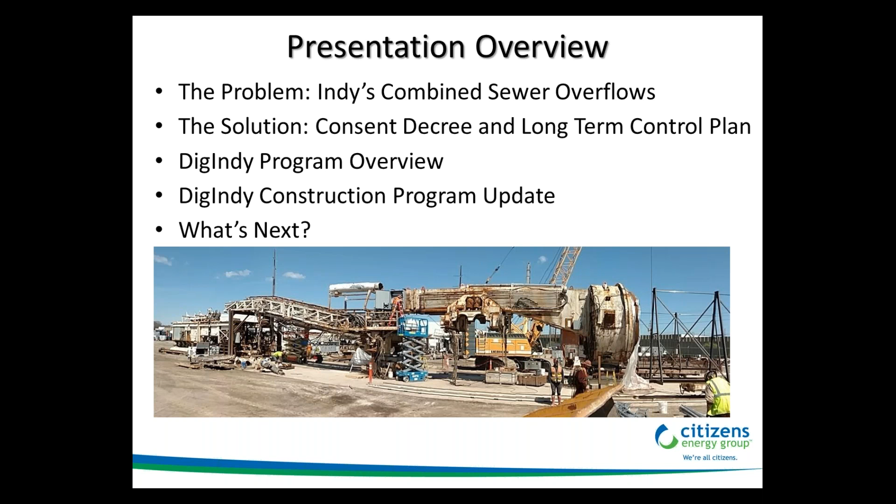Just to set the tone for the rest of the presentation, I'm not a big fan of slides with lots of words, so I'm going to try to keep those to a minimum. But there will be a few, so please just bear with me for a few slides, and then we'll get into more of a show and tell mode a little bit later on.

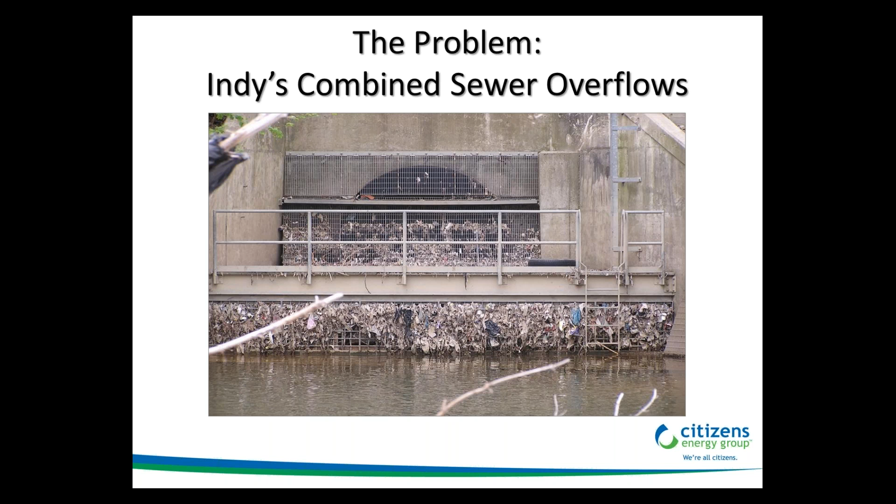So quickly, for anyone that may not be familiar with a combined sewer system, I'll provide this brief explanation. Basically, during dry weather, a combined system collects and conveys sanitary flow from residents and businesses to a wastewater treatment plant, where the flow is treated and released into a water body. However, during wet weather, the combined system also collects storm flow, and in many cases in our northern cities, snowmelt, which combines with the sanitary flow. During certain size weather events, the system becomes overwhelmed, and rather than backing up through storm grates and into basements, combined flow is released to a water body.

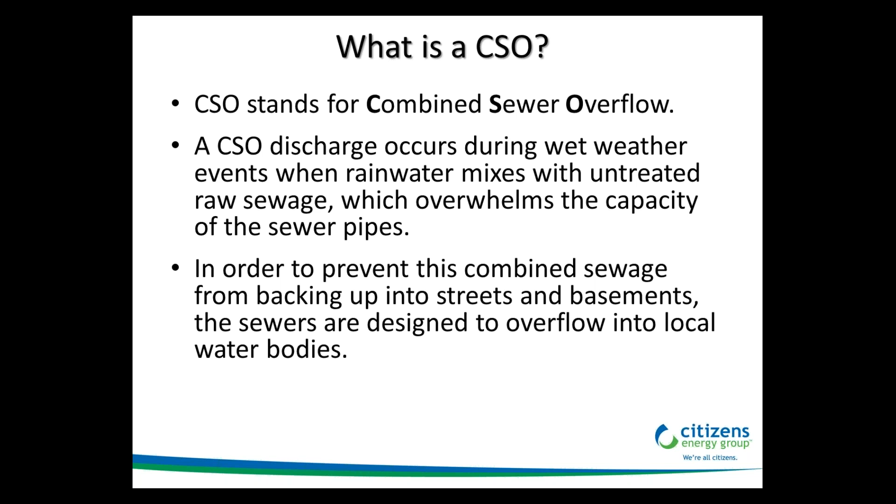And not to mention, portions of our system are so overwhelmed that as little as a quarter inch of rain in certain parts of town can trigger an overflow event.

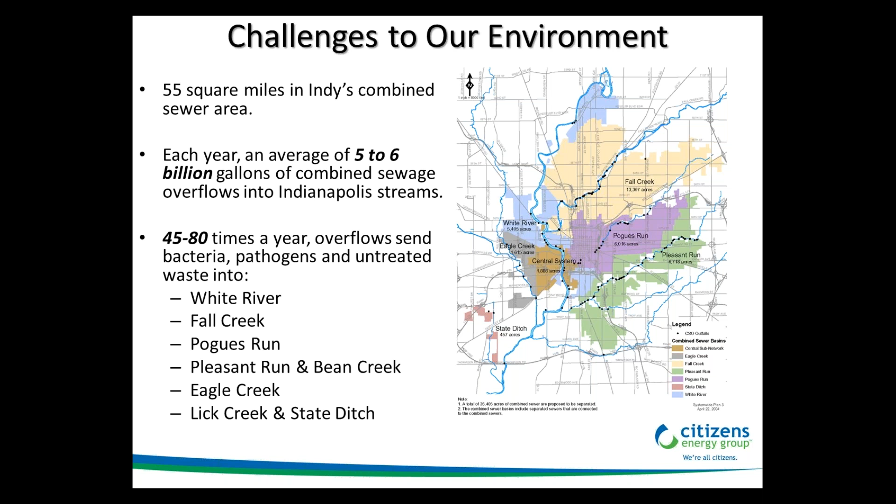So I've defined the problem. Now, what are we going to do about it? Just a little bit of background here. CSO abatement actually stemmed from the Clean Water Act. Ultimately, CSO communities must enter into some form of settlement with the Department of Justice and the EPA. Usually those agreements come in the form of a consent decree.

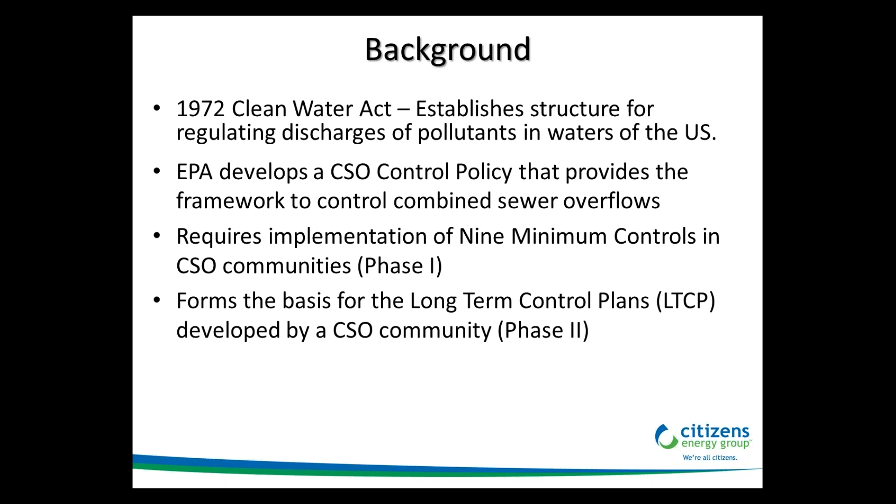A consent decree is a settlement binding a CSO community to comply with the EPA's CSO control policy. What I'll be concentrating on for the rest of this presentation is our long-term control plan, which lays out our DigIndy system, as well as the time frame for which we have to complete it. And finally, one other quick point before we get into the fun stuff.

The City of Indianapolis entered into their consent decree in 2006. But what is unique to Indianapolis' situation is that in 2011, Citizens Energy Group purchased the water and wastewater assets from the city. Per the terms of that purchase, Citizens became liable to comply with the terms of the consent decree, but the city actually remained party to the agreement as well. So it's actually in their best interest for Citizens to successfully comply with the consent decree.

Citizens is somewhat of a unique entity in that we are a public charitable trust. In fact, we are the only public charitable trust that provides utility service in the United States. The important takeaway here is that we exist solely to provide utility service to the residents of Central Indiana. We're basically a private company that operates on a zero profit basis, so we don't have shareholders to answer to. This is especially important when considering that we can procure projects outside of traditional municipal bidding laws, and I'll provide some examples of that in a few minutes.

As I previously mentioned, our long-term control plan was actually developed under the City of Indianapolis and their team of consultants, and Citizens inherited it in 2011. However, it does continue to evolve. Basically, there were a number of early action projects which utilized modified flow control or inline storage to take advantage of areas in the system that had excess capacity. And those projects actually eliminated a significant amount of CSO volume from entering our waterways.

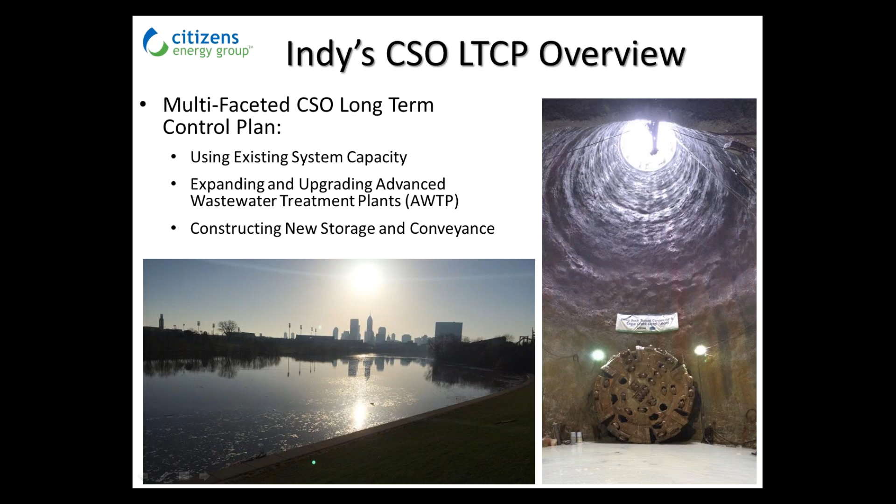The system consists of 6 interconnected deep rock tunnels, which will be 18 feet in finished diameter when complete. The entire system will convey flow from north to south via gravity, where it will end up at our Southport Advanced Wastewater Treatment Plant. So while we do have 2 treatment plants serving Indianapolis, all of the tunnel flow and all of the CSO flow connected to the tunnel system will be conveyed strictly to our Southport plant.

But after a CSO event, the flow will be stored in the tunnel, and then it will be lifted by a 90 million gallon per day pump station almost 300 feet vertically up into the plant. The entire system has a storage capacity of well over 250 million gallons per event, and that will allow us to comply with our consent decree terms, which requires 95% capture by volume.

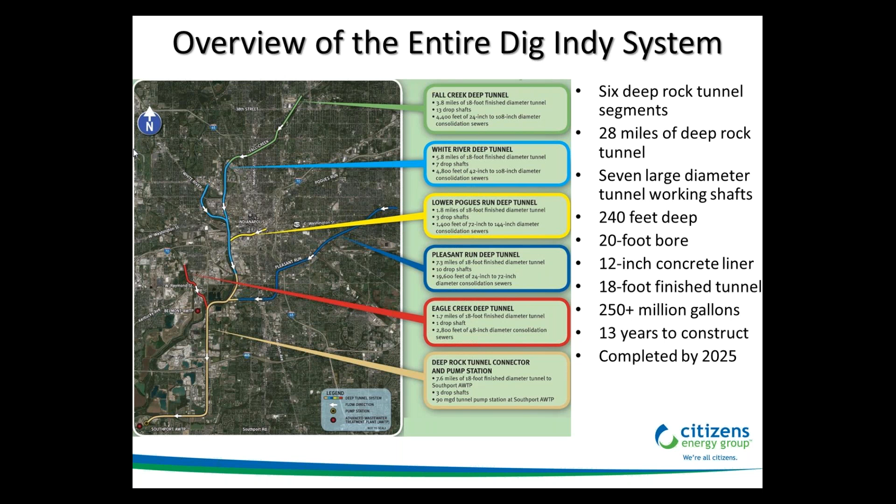Flow will be diverted from CSO outfall structures and consolidated through soft ground surface sewers, where it will enter one of 33 planned drop shafts. The drop shafts extend down into deaeration chambers, which are connected to the main tunnel through smaller tunnels referred to as adits. Depending on where the drop shafts are located with respect to the main tunnel, the adit lengths in our system can vary from a few feet to hundreds of feet.

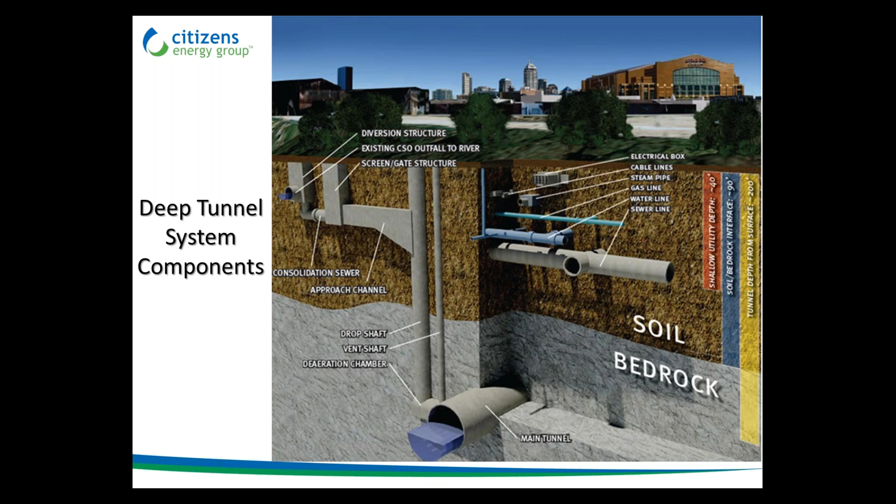At each drop shaft location, we also have a vent shaft that extends down into the deaeration chamber. The vent shafts are necessary because we utilize tangential vortex drop shafts, which entrain a great deal of air as flow falls down the drop shaft. The deaeration chambers allow for the air to escape rather than inhibit filling of the deaeration chamber and tunnel.

I mentioned earlier that we have 134 CSO outfalls in the system. The tunnel won't capture all of them, but we will be consolidating approximately 100 of them into 33 drop shafts. We want to keep the number of drop shafts to a minimum due to the cost to construct and the surface disruption, and we're actually studying eliminating 2 of them along our Pleasant Run alignment as we speak.

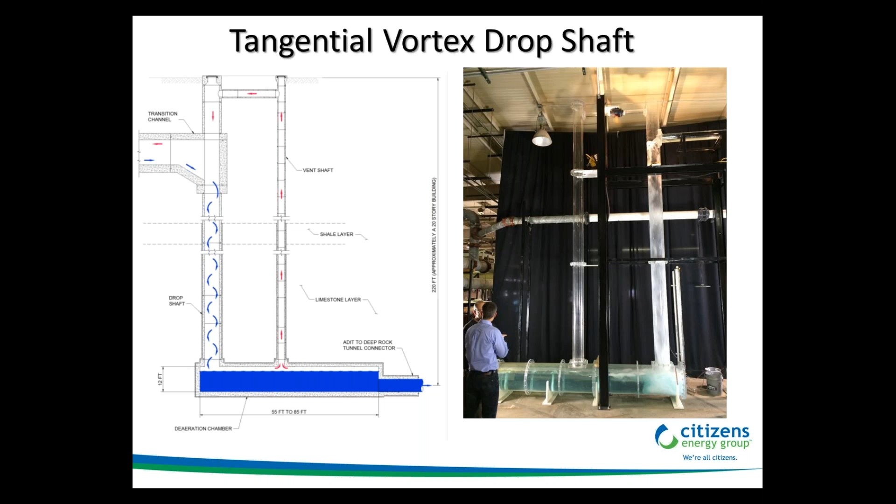So the program is constantly evolving. And because I mentioned the deaeration chambers and vent shafts, I want to take a quick second to discuss tunnel ventilation with respect to air exiting the main tunnel during filling.

Where it will eventually exit at the first few shafts it encounters. Our issue is that the first couple of shafts are small diameter utility access shafts, and the velocity and violence with which the air exits will cause geysering.

We know that other systems, including Chicago's TARP system, have had real issues with geysering, and they've actually experienced geysering events so violent that manhole structures have been blown out of the ground.

So we've done extensive research and physical modeling to understand this phenomenon, and to prevent geysering in our system, we're actually going to seal off our utility shafts where they intersect the tunnel, forcing the tunnel burp up to one of our larger diameter tunnel working shafts. We're also building bulkheads along the crown of the tunnel at a few of our branches to keep air from heading towards dead ends and direct it to larger diameter shafts.

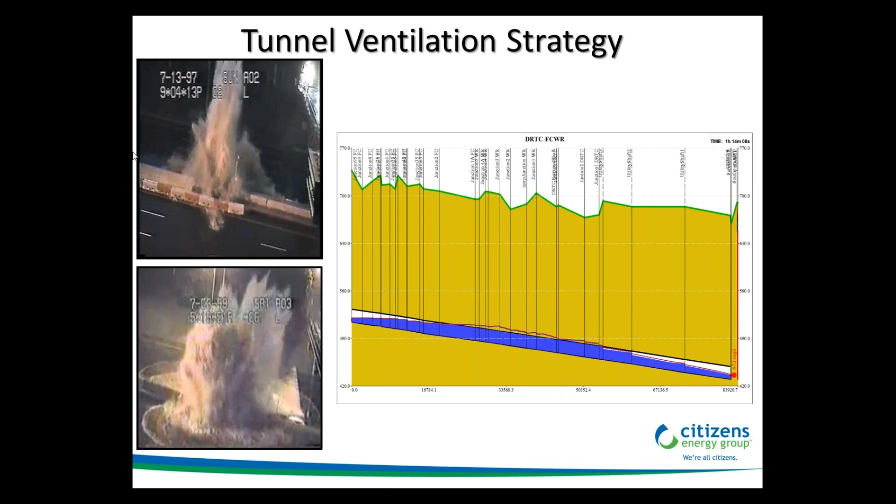They don't see it, but it's the miles and miles of shallow consolidation sewers and the drop shaft sites which are extremely disruptive to residents, schools, businesses, and traffic.

We have a whole team of folks that work to form relationships and educate literally thousands of stakeholders impacted by the tunnel construction. We also have a team of real estate professionals dedicated to the land acquisition necessary to construct a program of this magnitude.

Designing and constructing a project like this isn't possible without poking a few holes in the ground, especially since it spreads out over 28 miles. So I won't spend a lot of time talking about the geotech, but it's important to note just how extensive a quality geotechnical program is for this size of project.

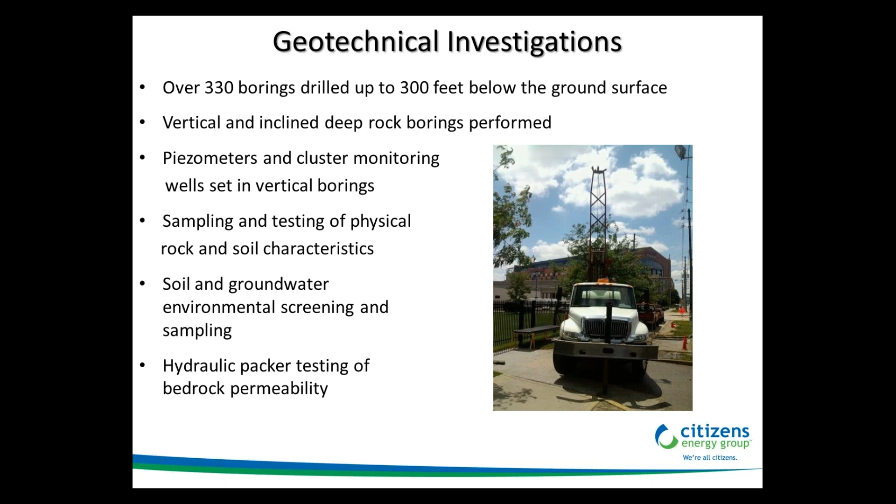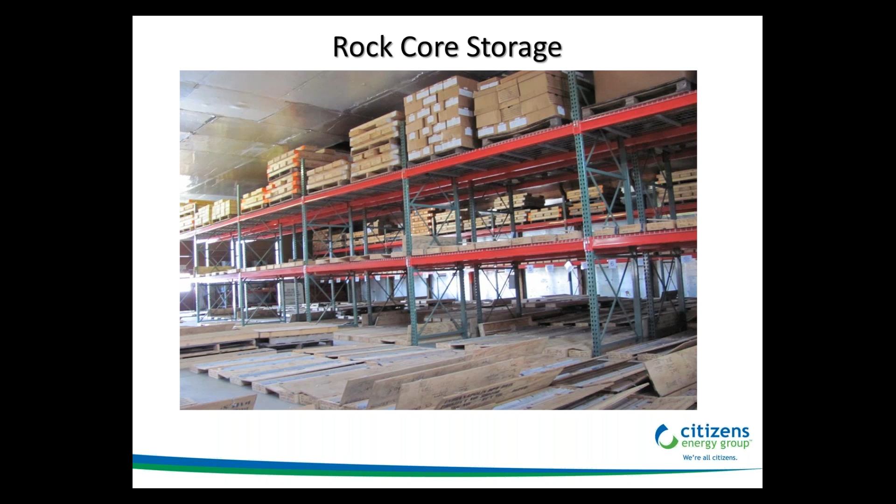You can imagine we collect a lot of samples with that many borings and the extent of the investigation. Here's a shot of part of our rock core storage warehouse, and another view of the other half with cores laid out. This was during a procurement event for our first tunnel project where contractors and their engineers were welcome to view the cores.

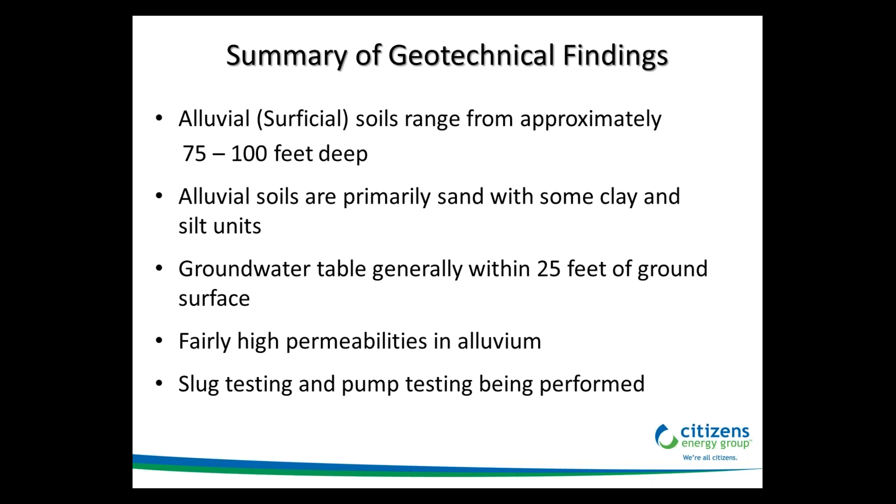So what did we find? Basically, on average, we have about 100 feet of glacial outwash over the top of our bedrock in the Indianapolis area. And we have a high groundwater table, which makes construction through pervious overburden very challenging. With respect to our rock, we have really favorable rock for tunneling. It's strong, but it's not overly hard or abrasive.

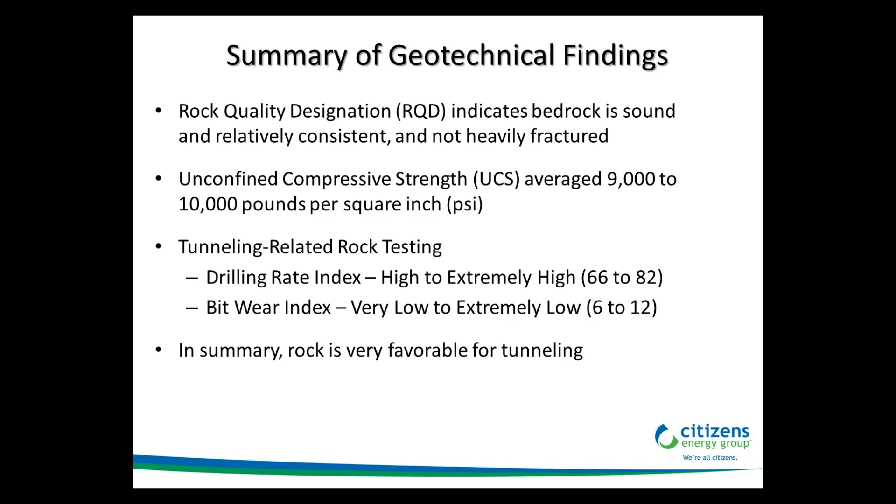Here's a representative illustration of our geology. We have Devonian and Silurian carbonate rock underlying most of Indianapolis. The shallowest bedrock formation along much of the alignment is the New Albany Shale, which is of the Devonian and Mississippian geologic age. Underlying that shale, our carbonate formations consist of North Vernon limestone, Vernon Fork limestone, Geneva dolomite, and the Wabash dolomite.

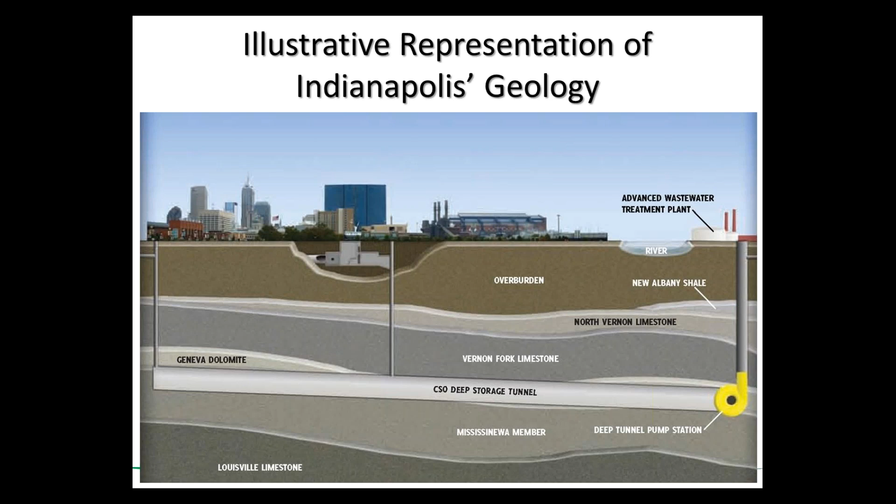I realize this is probably a little difficult to read, but we do have an aggregate mine within close proximity to the tunnel project. So here's another representation of the area geology.

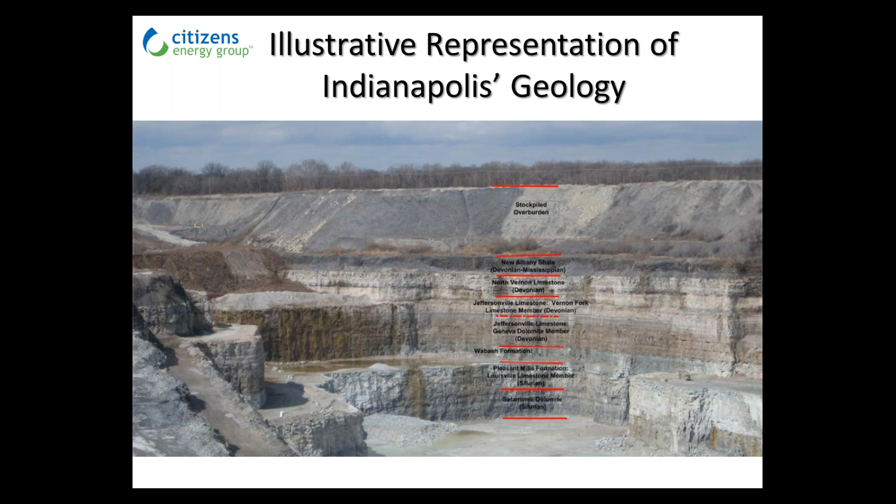We also have the potential for some karstic features, which can and do make water. We've never encountered one this large in the tunnel bore, but I've seen a few in the sidewalls of the tunnel that are actually on the order of a few feet in diameter.

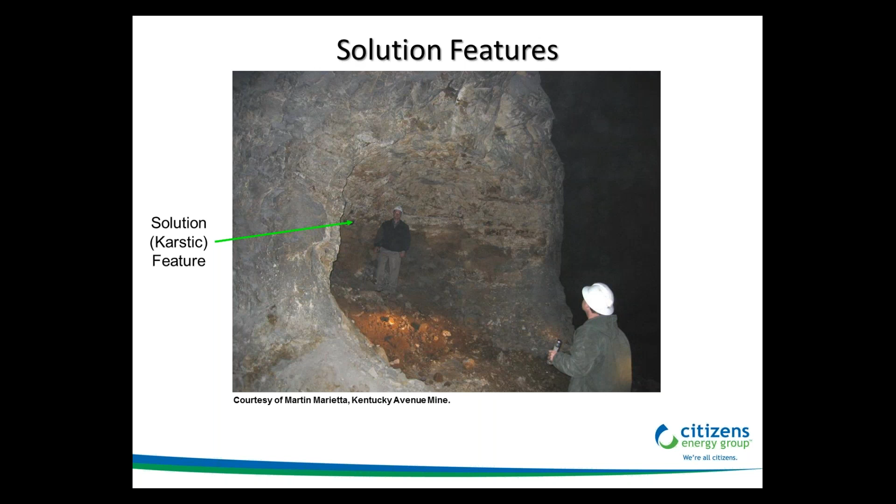So now I will transition over and spend some time discussing where we're actually at with the construction side of our program.

Based on the terms of the consent decree, we have a staged construction schedule. This allows us to spread out the construction effort and spend over time while still bringing parts of the tunnel system online early in order to gain beneficial use and start getting CSO flows out of the waterways as soon as possible.

For example, when we bring the Deep Rock Tunnel Connector and Eagle Creek Deep Tunnel online later this year, we'll begin capturing about 1.3 billion gallons of CSO annually. And when White River Tunnel and Lower Pogues Run tunnels come online at the end of 2021, we'll experience a huge increase in that annual capture.

So beneficial use before the end of the program is a big deal to us, and it also demonstrates to our ratepayers who ultimately fund this project that we are making steady progress and recognizing environmental benefits along the way.

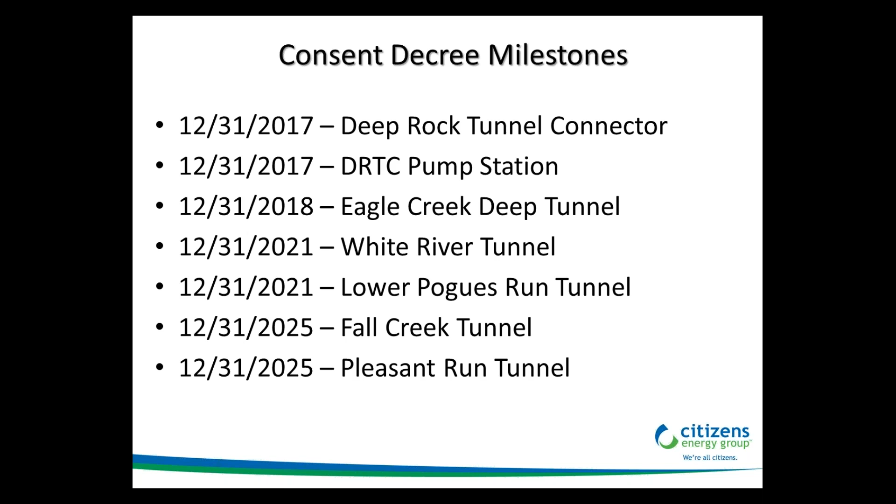I want to quickly point out that since construction commenced in January of 2012, we've received a lot of favorable press, both nationally and internationally. In fact, our project was recognized by ITA in 2015, which was a big honor. Of course, this is a testament to our engineering team and contractor. As an owner, we remain very humble and understand that without a huge team of talented people, success of this program wouldn't be possible.

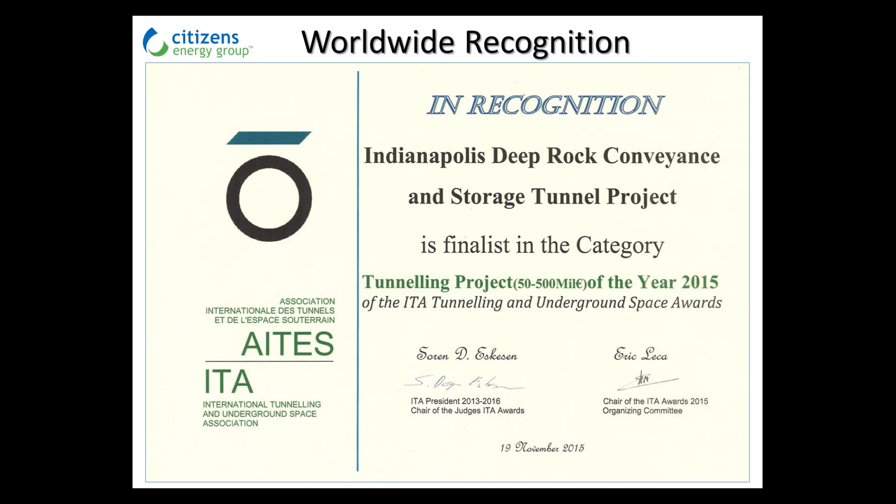So now I'm going to take us on a little trip along the alignment. For perspective, the red arrow shows the location of our Southport treatment plant, which is the southern terminus and extreme downstream end of the entire system. It is the location of our deep tunnel pump station, as well as the launch shaft site for the first two legs of our tunnel system, the Deep Rock Tunnel Connector and the Eagle Creek Deep Tunnel. Those will be the two tunnels that we'll concentrate on for much of the remainder of this presentation.

I just want to take a second. I keep saying deep, so I want to provide some perspective to what our definition of deep is relative to our system.

On the right is a schematic showing the end of the line of our tunnel system and its connection to our deep pump station. If we were to place the Statue of Liberty in the bottom of our pump station, only her torch would stick out of the top of the shaft. That's just a reference for what deep means with respect to our tunnel. I'll also point out that the schematic shows 2 shafts down to the tunnel prior to the connector tunnel to the pump station, which will be important in the next slide.

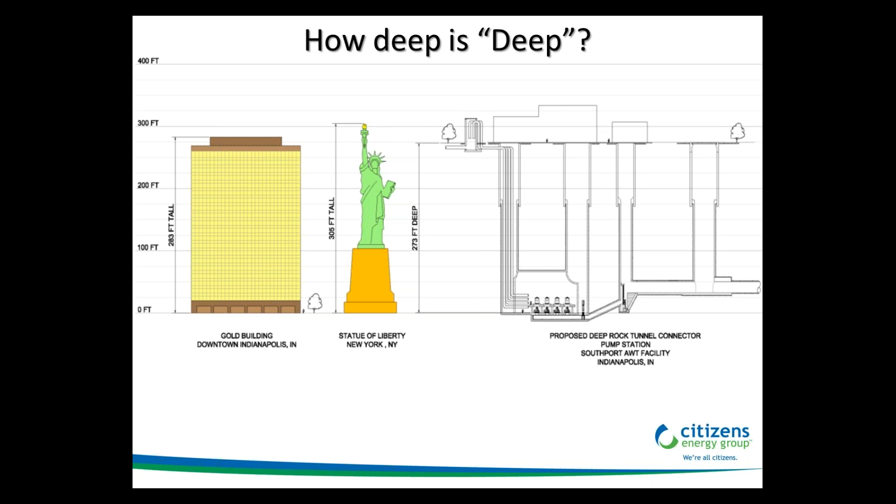Here's a closer look at our pump station. Following a wet weather event, when the pump station is activated, CSO will enter the screen and grit shaft through the 18-foot diameter tunnel, or flow through a bar screen on its way through a 6-foot diameter connector tunnel.

The connector tunnel feeds a 6-foot diameter suction header, connected to 4 30 MGD pumps. The station is rated at 90 million gallons per day, so 3 pumps with 1 in reserve. Flow is lifted by the pumps up twin 42-inch discharge lines, where it is then conveyed to the treatment plant via gravity.

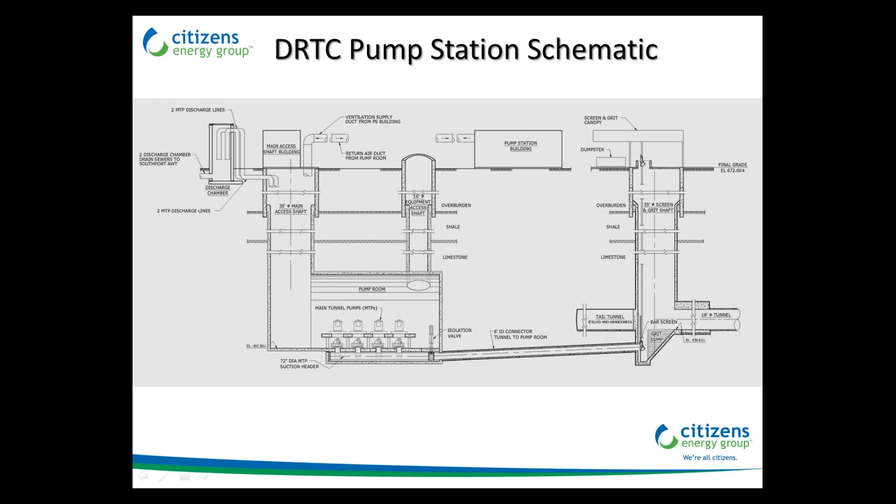One thing I'd like to point out is that the original tunnel launch shaft and the screen and grit shaft were 2 different structures, as shown on the previous slide. However, through a value engineering exercise, the dedicated screen and grit structure was eliminated, and the tunnel launch shaft was converted into the screen and grit shaft after completion of the tunnel. This saved an estimated $8 to $10 million, and anywhere along our system that we can eliminate tunnel working shafts or drop shafts, we have done so, which adds up to huge savings over the course of the program.

For you mechanically inclined folks listening today, here are some stats on our pumps. Our pump station contractor is a joint venture between Oscar Renda and Southland, both out of Texas. The pump station project commenced in mid-2014 and is expected to come online by the end of this year.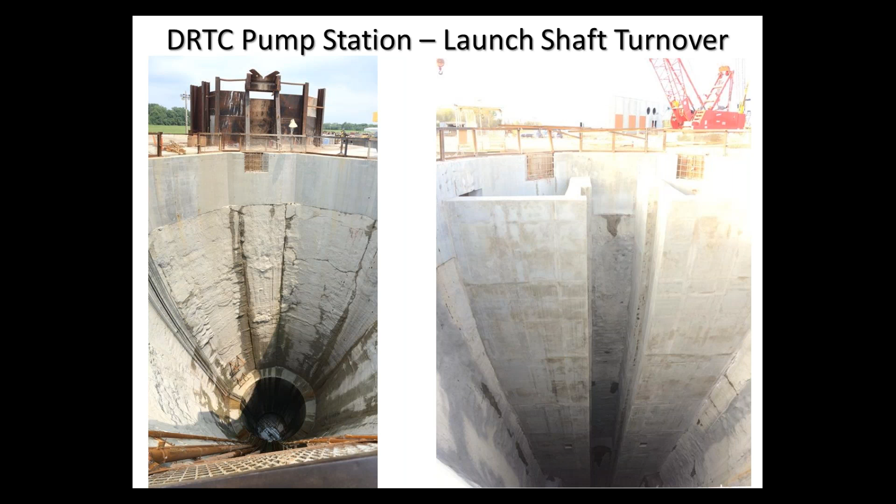On the left-hand side is our tunnel launch shaft prior to the screen and grit build-out. This was after mining was complete and the tunneling contractor demobilized from this shaft. On the right, you can see the guide walls that have been cast, which house 2 sets of guides for the rake mechanism that cleans the screens and the grit clam bucket to travel up and down.

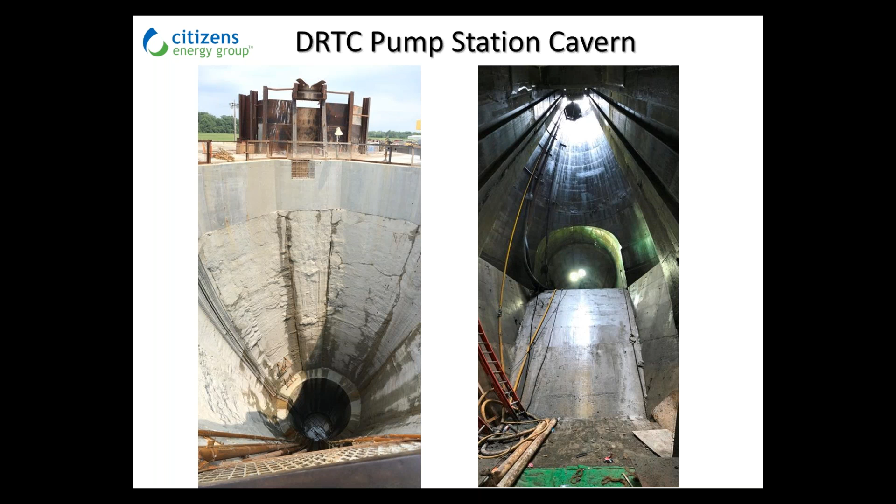The project was originally awarded just as the Deep Rock Tunnel Connector, as the Eagle Creek concept was for a shallow interceptor to be solicited at a later time. However, that shallow interceptor was a very high-risk project that extended open-cut construction through a business corridor, a residential neighborhood, and the city's levee and flood control system.

Our contractor was aware of that future soft ground project, but they proposed making it a deep rock tunnel to mitigate the risk from the soft ground option. Their proposal included backing the tunnel boring machine up after finishing the Deep Rock Tunnel Connector drive and then relaunching it up the Eagle Creek alignment underground without the need for an additional shaft.

This concept was very innovative, and we worked with our engineers to fast track a design. We had to go out and get additional geotech, and work with our permitting agencies. In about five months or so, we went from conception of the idea to actually mining. It was a really quick turnaround in a big effort.

But we were able to construct that Eagle Creek Deep Tunnel for less than the soft ground concept in the end. And due to the additional storage volume of 17 million gallons that the Eagle Creek leg provided us, we were able to eliminate about another $15 million in planned infrastructure that was downstream from this area.

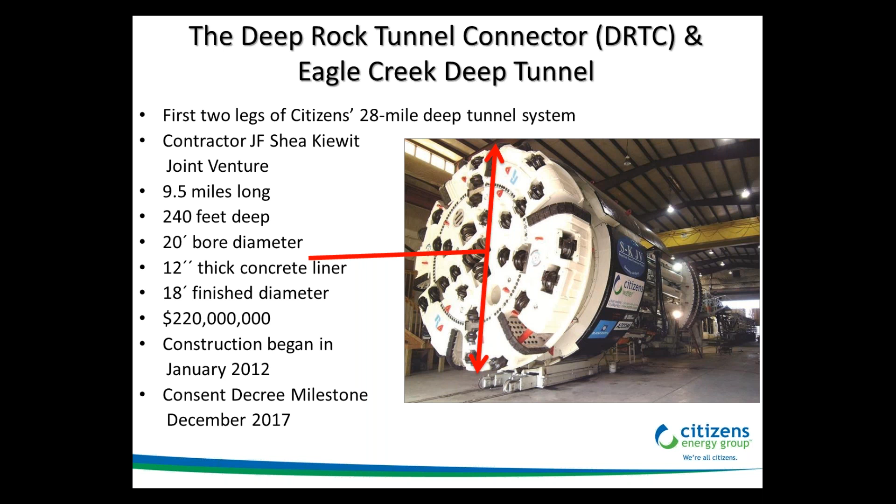I mentioned earlier that we are somewhat of a unique entity in that we are private, and so sometimes you have the advantage of being able to do things like a fast-track $38 million change order. So for us and our ratepayers, as well as the environmental impacts that change had, it's a huge benefit at times.

Speaking of the cutterhead, our contractor is using a Robbins main beam tunnel boring machine. In an effort to save a little time, I won't show the animation, but I will encourage everyone to check it out on YouTube later.

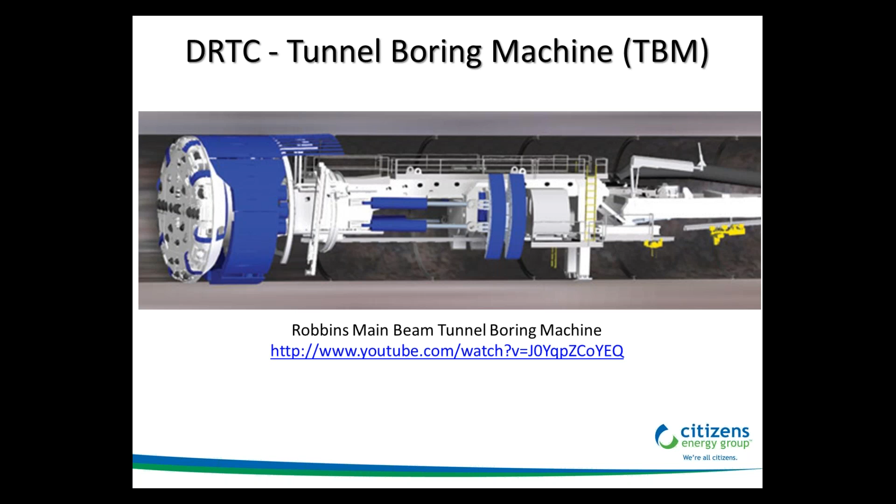Just a couple of interesting facts about our TBM, which is actually 40 years old and has been refurbished multiple times. It spent most of its life in New York and was most recently part of the Second Avenue subway project. One thing I'll call attention to is that our TBM produces approximately 20 cubic yards of loose rock spoils per foot of advancement. So basically, one tri-axle dump truck leaves the site full per foot of tunnel mined.

Pretty amazing considering that the first two tunnel legs were about 51,000 feet. So that is a lot of truck trips and a lot of diesel fuel.

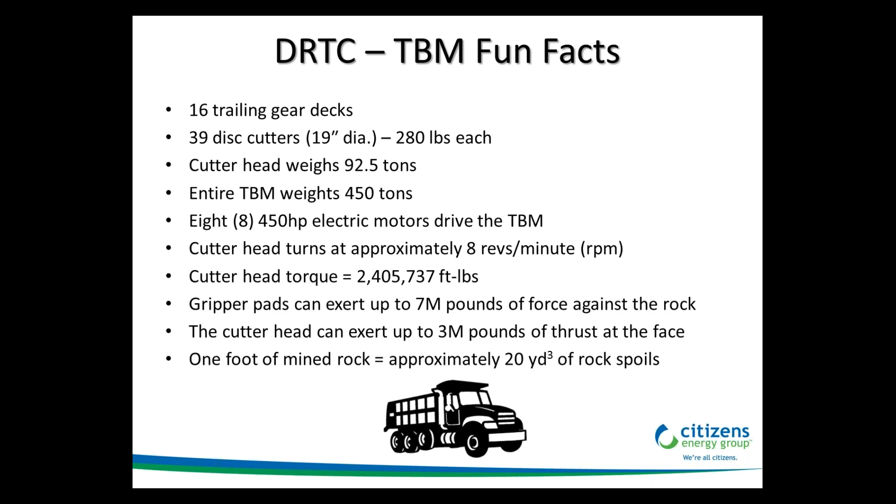I'll also point out that our contractor and this TBM achieved three mining world records for hard rock TBMs between 20 and 23 feet in diameter. This is a testament to the design of the cutterhead, which Robbins made specifically for this project, the refurbishment of the machine itself, obviously the contractor's forces, and the quality of our rock that I mentioned earlier. The contractor claims on future projects in Indianapolis they will break these, so we will stay tuned.

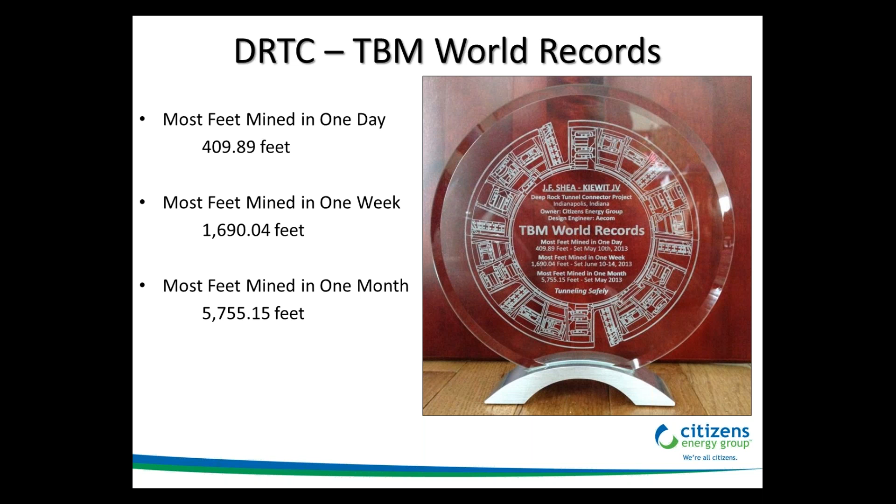In fact, the further out we got, I would venture a guess that the conveyor system was probably the limiting factor to the TBM production rate, but it did operate very well over the 7.8 miles of that first alignment.

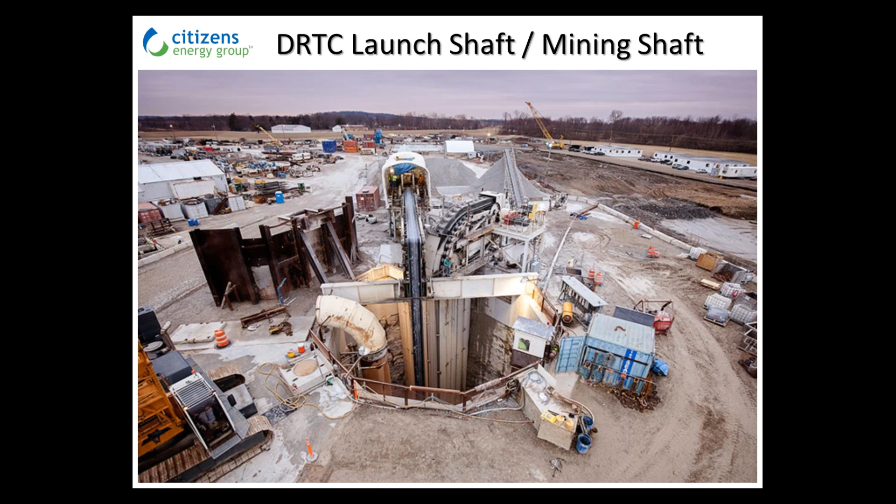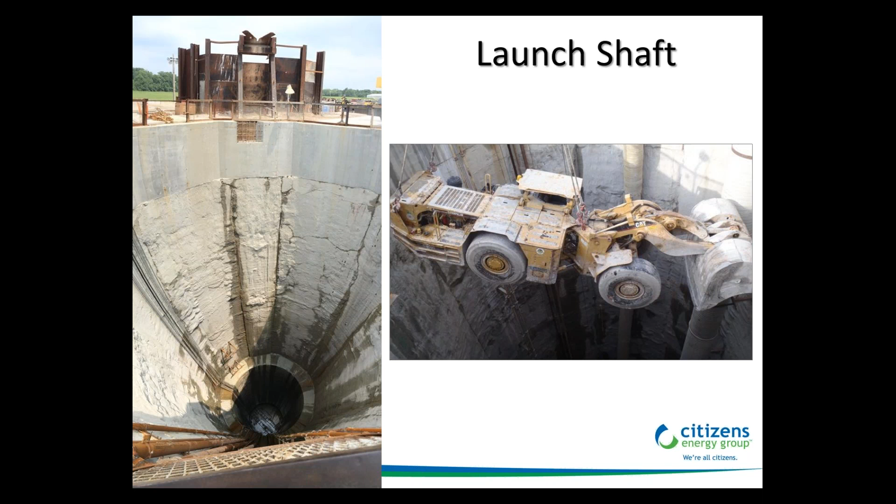And we don't have an elevator or a stairwell, so the crane and cage is our only means of access down into our tunnel system. Just a couple of nice shots of the bottom of the shafts with the tail tunnel visible in the photo on the right.

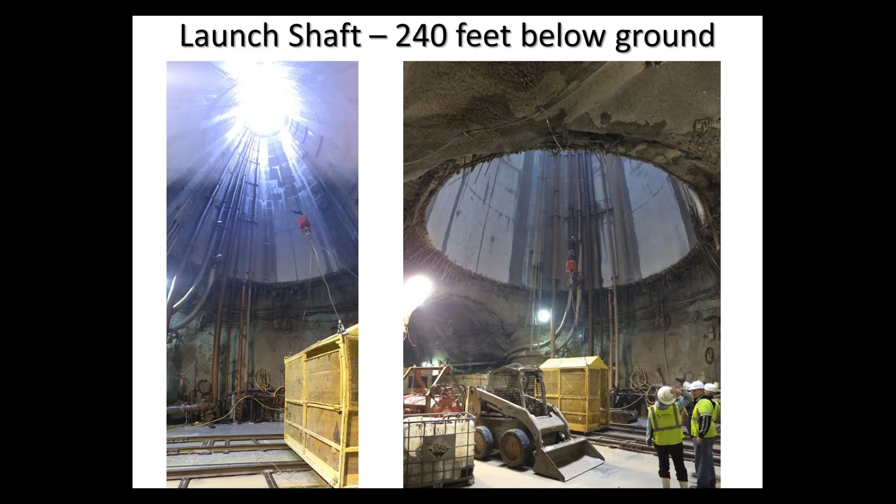After the main shaft was constructed, the contractor then constructed a 500-foot long starter tunnel in order to assemble the TBM underground. It was about 24 feet high and was excavated in a horseshoe configuration using drill and shoot techniques. In the foreground, you can see the false walls that were necessary to allow the TBM's gripper pads to react against during the initial mining launch.

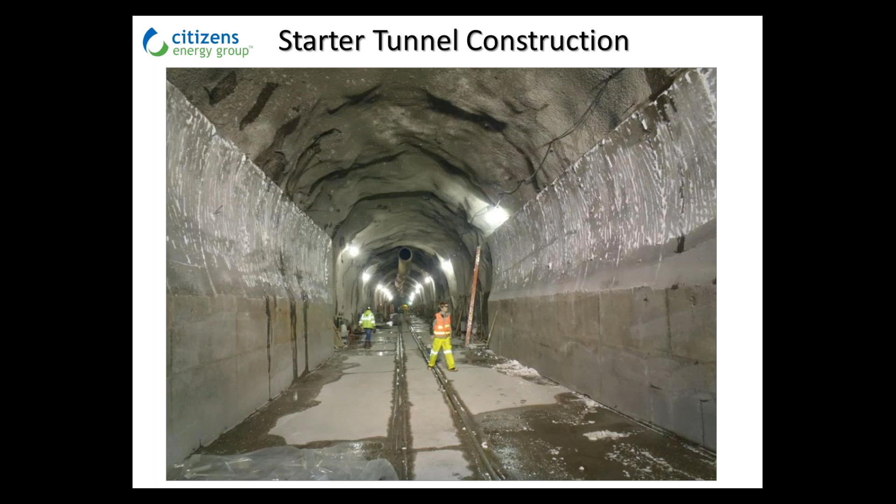And this is what our mined tunnel looks like. The photo is taken right at the transition from the starter tunnel to the mined tunnel, and you'll notice that primary support is by really a modest rock bolting pattern along the crown. And of course, you have all of the various utilities required to support the tunnel boring machine.

And here's one of our many curves that I referenced earlier, which does challenge the conveyor system, as it is a very, very long rubber band that wants to be in a straight line, not go around curves.

So we'll take a quick trip up to our Eagle Creek Deep Tunnel alignment. We have the DRTC alignment to the right and the Eagle Creek Deep Tunnel to the left.

So as the TBM reached the upstream terminus of Eagle Creek, which was about 9,200 feet from where this photo was taken, it was actually backed down to this bifurcation and then walked about 11,000 feet back up to the Deep Rock Tunnel Connector alignment, which was previously mined, and it was parked underground about 500 feet past the retrieval shaft. And I do want to point out that this is exposed rock, pre-concrete liner, and this just is another reminder of how lucky we are from a geological standpoint.

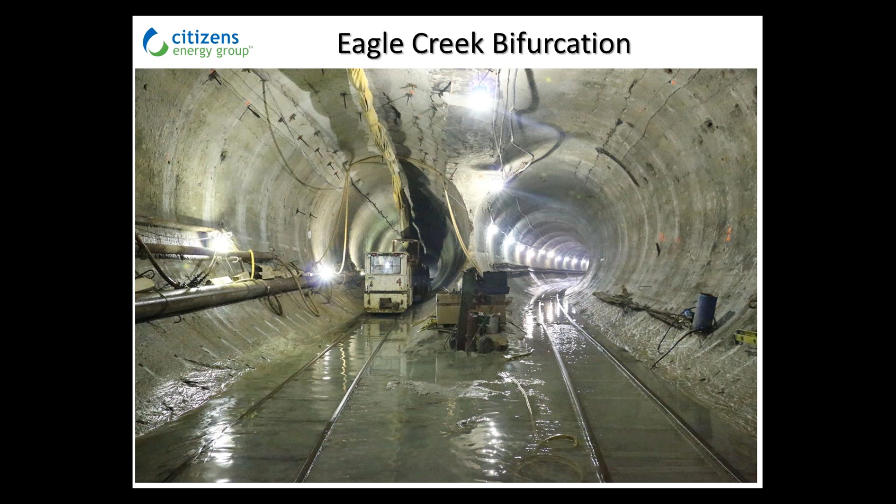And I mentioned earlier that once mining is complete, all of the tunnels will be lined with concrete. So here's a shot of the concrete lining formwork, and perhaps it's the nerd in me, but for some reason, whenever I see this, it reminds me of the Millennium Falcon.

But I digress. So the lining operation was absolutely amazing. Once the contractor got in a groove, they could form, pour, clean up, strip forms, and relocate forms in a 24-hour period. So they formed and poured 240 feet of liner per day, which required up to about 600 cubic yards of concrete per pour.

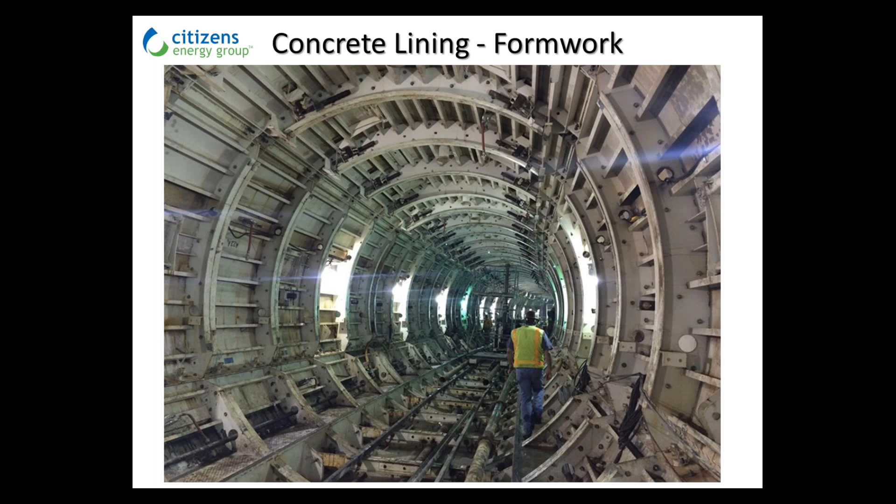Concrete was pumped from the ground surface through various shafts and drop holes and could be pumped up to 3,500 feet horizontally in either direction from a single drop hole. And here's the finished product. Over the course of the first two tunnels, the contractor placed about 130,000 cubic yards of concrete.

And following the concreting operations ongoing right now, the contractor is performing post-lining grouting through the areas where inflow is beyond specified limits.

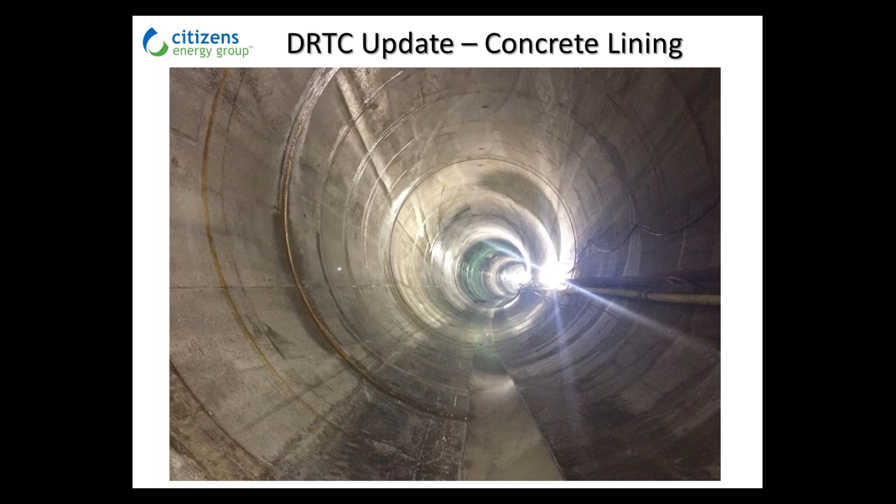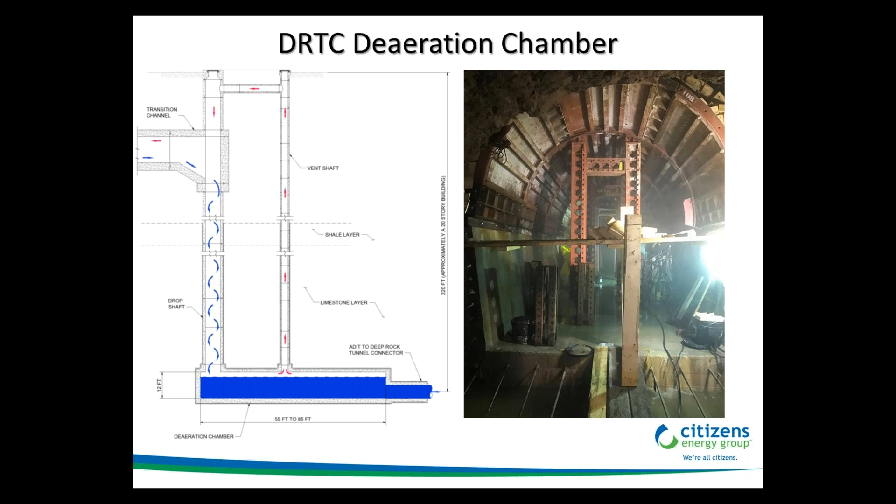Earlier I described the vortex drops and the deaeration chambers. So here's a shot of the concrete formwork in one of the deaeration chambers, and this is very difficult handwork, 225 feet underground in very tight space. This is some of the slower work and some of the more expensive work. So again, where we can eliminate drop shafts and deaeration chambers, it saves time and money. But these guys do a really good job in very tight quarters.

And here's a shot of one of the adit tunnels prior to lining. The adits, again, connect the deaeration chambers to the main tunnel. In fact, you can see the main tunnel lit up at the end of this adit. And once the deaeration chambers are complete, they are connected to the main tunnel through the adits with Hobas pipe.

And a quick couple of slides describing how our drop and vent shafts are constructed using raise bore methods through rock. Through the soil overburden, we obviously have to use top-down methods like the slurry drilling and steel can support I showed earlier in the presentation. But we actually did build a few shafts early on through the rock using top-down methods, but they were very expensive and cumbersome and also time-consuming. One of the other issues is top-down rock drilling of this magnitude takes up a lot of real estate on the ground surface.

If you're not familiar with the raise bore method, it's a bottom-up excavation method which is extremely efficient. In its simplest form, a pilot hole is drilled, the pilot bit is taken off, a reaming bit is attached, and then the reamer is turned as it advances back up, and rock falls into the tunnel where it's collected and disposed of.

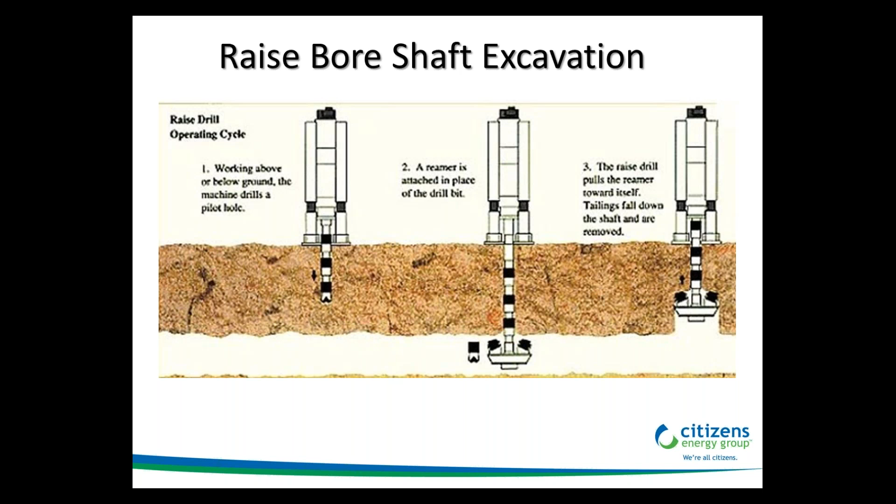The raise bore method requires a much smaller footprint on the surface than top-down methods. On the left you can see the raise bore rig, and on the right you can see the reamer getting ready to make its journey to the surface.

This method worked so well on our first two tunnels that we specified it as the only acceptable method on our four future tunnels. The only caveat is that the tunnel and deaeration shafts have to be mined and excavated first, which can affect construction sequencing if you don't have an adequate amount of schedule.

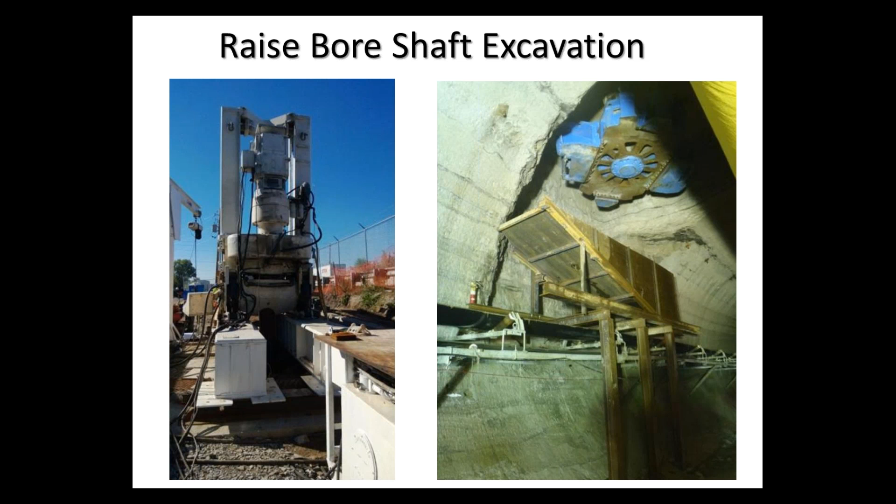For the future work, the tunnel contractor will be responsible for constructing the shafts to the surface, but we will solicit separate packages for the consolidation sewer work and surface connections to those shafts. This actually allows local contractors a chance to get at some of our work on the program, beyond the highly specialized tunneling packages that typically go to the big national firms from out of town.

Now I want to head up to the Deep Rock Tunnel Connector Retrieval Shaft, which is also our White River Tunnel Launch Shaft. As I mentioned earlier, the TBM was parked about 500 feet past the retrieval shaft. This was done to get a head start on the starter tunnel for the White River Tunnel alignment.

The contractor elected not to excavate the shaft down to the design invert, in order to allow the gripper pad something to react against as the machine mined through the shaft and out the other side.

Upon initial breakthrough, the contractor actually mined about halfway into the shaft and then backed the TBM up to the face, strictly for a photo opportunity. But that made the owner really happy, as well as the media, and I think the tunnelers' forces got a kick out of having a nice hole-through party.

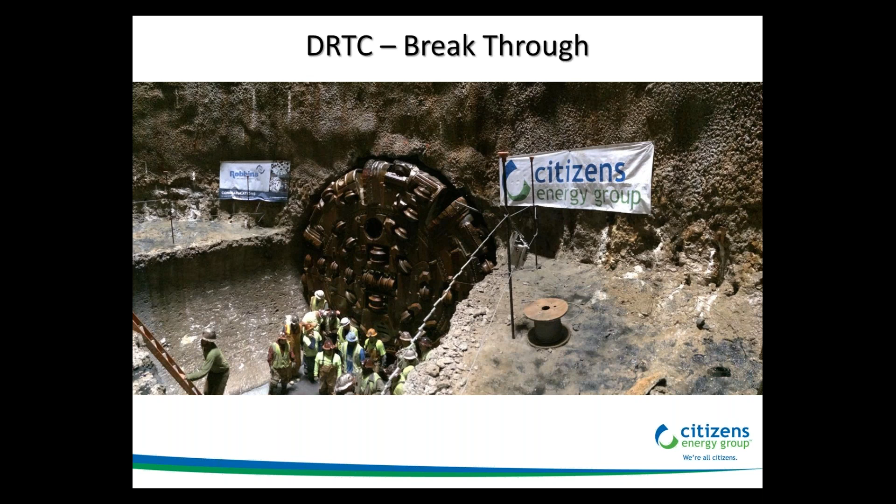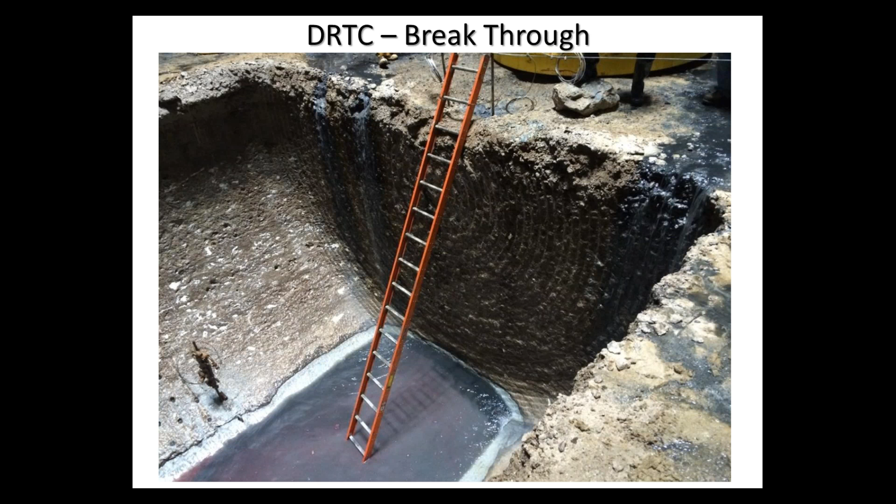Mining into the shaft and backing up provided a very interesting view of the rock face, which you don't normally get. It shows just how the disc cutters score the rock in a radial pattern as our tunnel boring machine cutter head advances.

Here's a cool shot you don't get to see very often — this is our tunnel boring machine actively mining through the shaft while partially exposed. Again, it drove about another 500 feet past that shaft, where it was parked underground.

To put closure on the Deep Rock Tunnel Connector and Eagle Creek Deep Tunnel projects, we anticipate substantial completion will be achieved by May of this year. So in a couple of months we're really rounding third on those projects. One of the last tasks we have to complete is installation of fiber optic cable through the tunnel system, which will connect all of the tunnel instrumentation, the remote screen and gate structures, and both of our treatment plants.

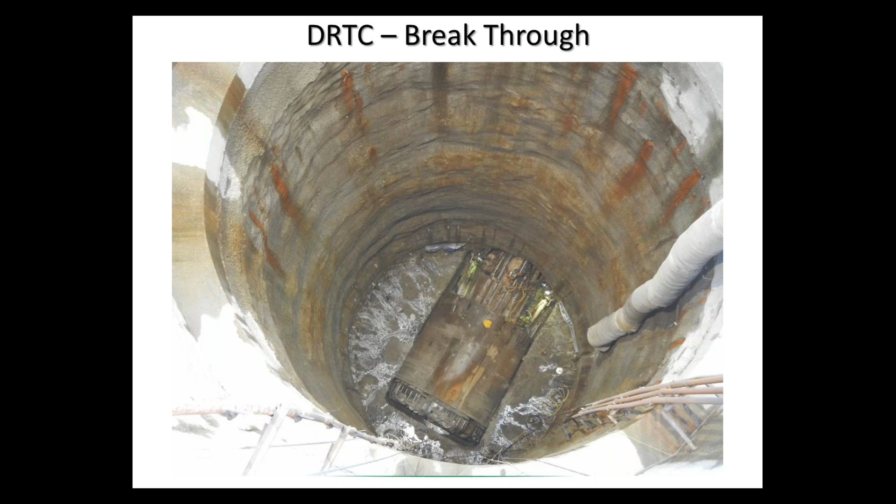As we've been busy constructing the first two legs of the tunnel and the pump station, in 2015 we held a solicitation event for the construction of our next two legs of the tunnel system: the White River and Lower Pogues Run tunnels.

The tunnels had to be packaged together because mining is going to progress up the White River alignment, shown in light blue. Then the TBM will veer off and mine the Lower Pogues Run tunnel alignment, shown in yellow. Similar to the Eagle Creek tunnel, once the terminus of the Lower Pogues Run tunnel is reached, the tunnel boring machine will be backed down the mined tunnel and relaunched underground, back up the White River alignment. This same scenario will be executed again when the contractor mines the dead-end hook portion of the White River alignment, visible to the northwest.

We learned a lot of lessons about backing up the TBM on the Eagle Creek Deep Tunnel, which actually allowed us to eliminate a retrieval shaft at the end of Lower Pogues Run. Being able to back up is really a strong tool in our toolbox, and it has allowed us to do some great things, especially from a scheduling standpoint. So I might even venture a guess that when our program is over, this TBM will perhaps hold a world record for total feet backed up by a TBM as well.

So based on the proposals during that 2015 solicitation that I mentioned, we awarded the project to our incumbent contractor, the Shea Kiewit Joint Venture.

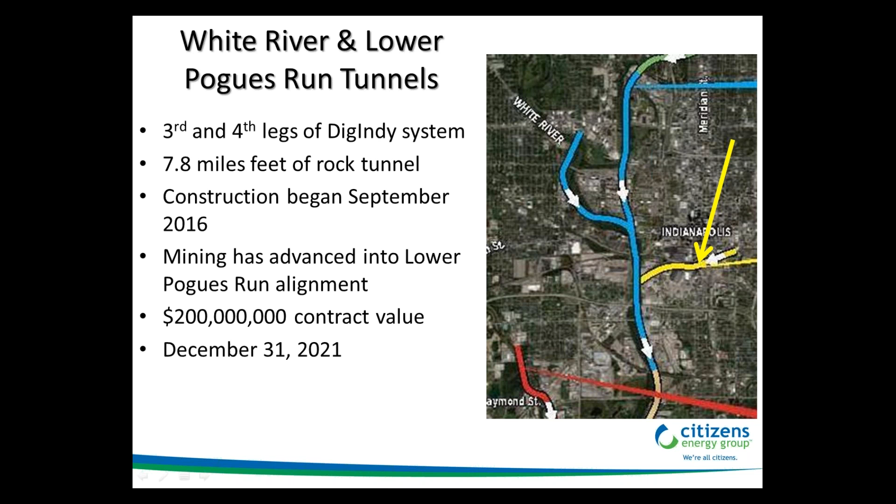I'm going back to this slide to demonstrate the number of surface sites that we're going to impact over the course of our program. I want to draw your attention to one site in particular, located on our White River tunnel alignment - in fact, it's the end of the line I referred to earlier. This is an example of collaboration with third-party stakeholders. Because our program is so long, and in some cases locations identified during design are very different than when you actually arrive to build something, it's imperative to be flexible and keep in close communication with all parties involved.

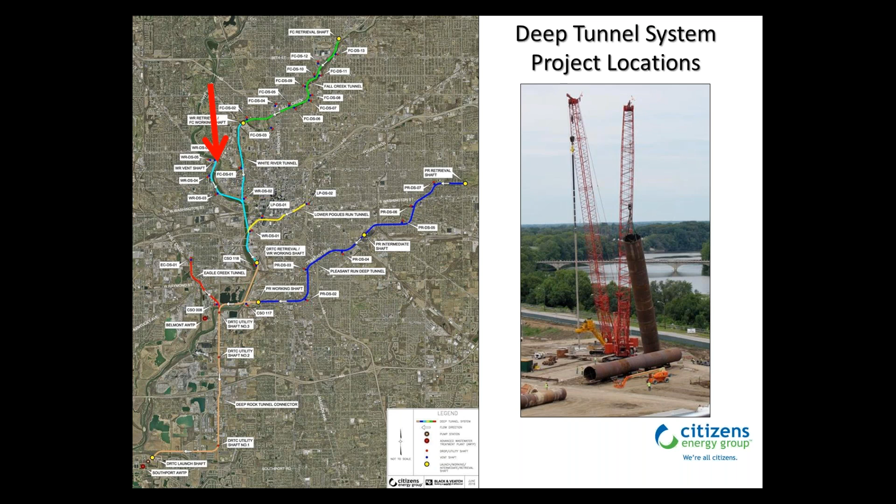In this case, the city of Indianapolis and a large real estate developer were going to transform Indy's old minor league baseball park into luxury condominiums. However, we had identified a portion of that property as the location for a drop shaft, as it was located near 2 large CSOs on our system. So we actually fast-tracked the design and construction of that infrastructure and constructed it almost 7 years ahead of when the tunnel will actually connect to it.

This is one of those cases where we had to use top-down shaft construction methods through the rock down to the tunnel elevation, and part of the reason we don't want to do it anymore is the experience we had on a couple of these early projects. But we were able to get in and out without delaying the development, and future tunnel connections will be made underground once the tunnel alignment extends to that point, so we won't have any future surface disruption in this area.

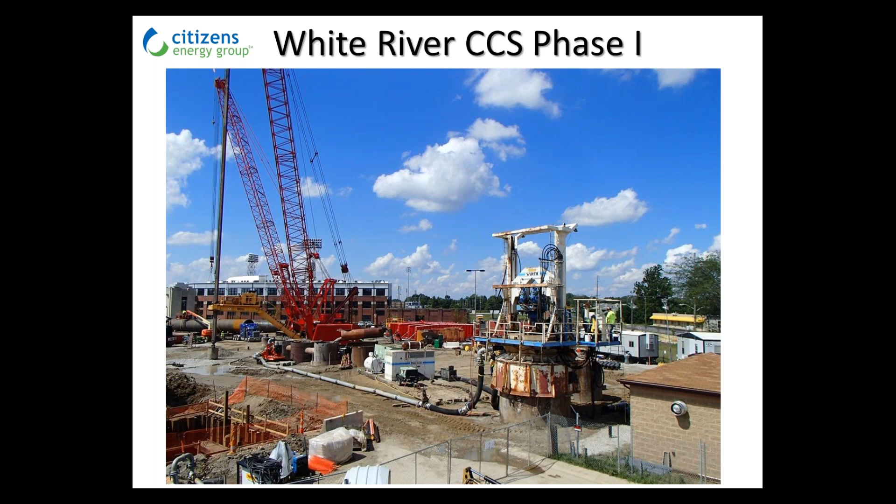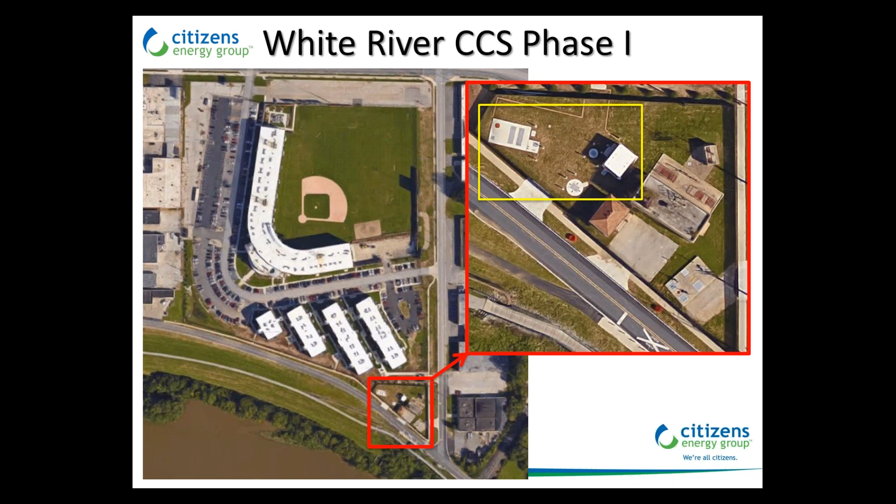Here's a shot of the completed development in the background and our infrastructure in the foreground. While construction disruption is very large, the infrastructure we leave behind is very discreet. This is one example of a couple of projects we've had to build ahead of our original schedule to accommodate external stakeholders, but from a community standpoint, it is the right thing to do.

To wrap up here, just a quick peek at what's next. I already mentioned the White River and Lower Pogues Run tunnel status, but here you can see all 4 of our remaining tunnels that will be constructed by the Shea-Kiewit joint venture with respect to one another.

Once the tunnel boring machine reaches the end of the light blue line, the White River tunnel, it will then continue on mining the Fall Creek tunnel, where we will have a retrieval shaft at the end of Fall Creek, and that tunnel boring machine will be disassembled, brought to the ground surface, and undergo another full refurbishment prior to remobilizing it to mine our Pleasant Run tunnel, because that Pleasant Run tunnel is another 7.3, 7.4 miles of tunnel. So just to make sure that machine will get us to the end, we do have another refurbishment planned.